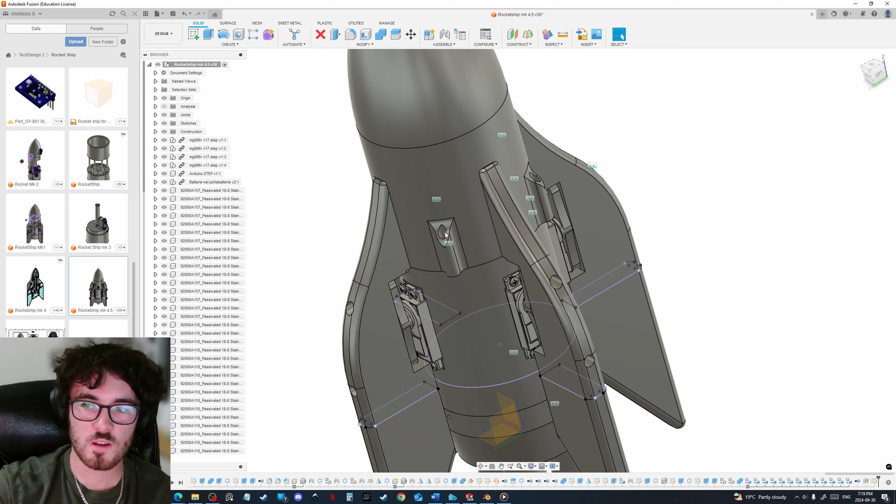So you can see that it was made through 3D printing, and it has a bunch of restrictions because of all of the electronics. It needed to fit the sizes, and the design part of SolidWorks is all about understanding how to design something based on the restrictions of your manufacturing or based on some kind of constraint and to solve the problem.

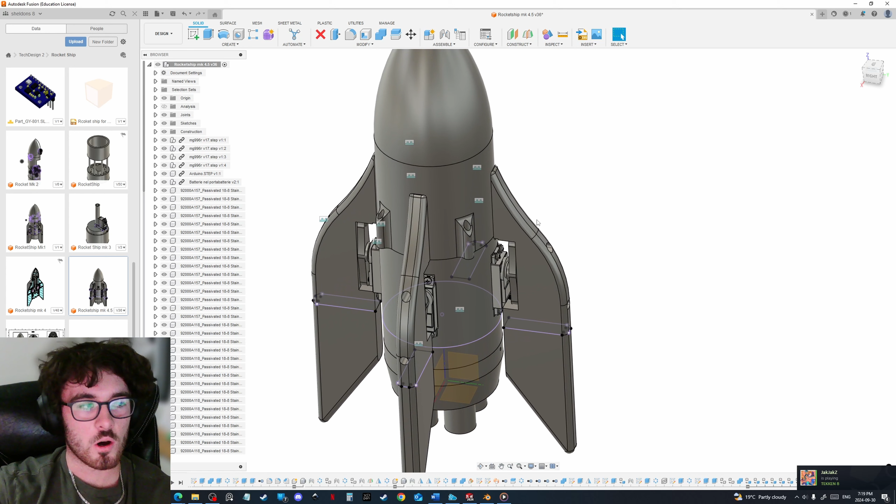But what we're concerned with right now is actually just trying to figure out how to model the parts, and then once you are fluent in being able to model something, then you can easily just apply whatever constraints you have to the modeling rather than trying to do it the other way around when you don't have a good basis for modeling in the first place.

So right here I have a part that I've submitted for the Formula SAE team at Queen's. This is just a generic part. I don't really know what it does. And I want to take a sec to just talk about what SolidWorks is.

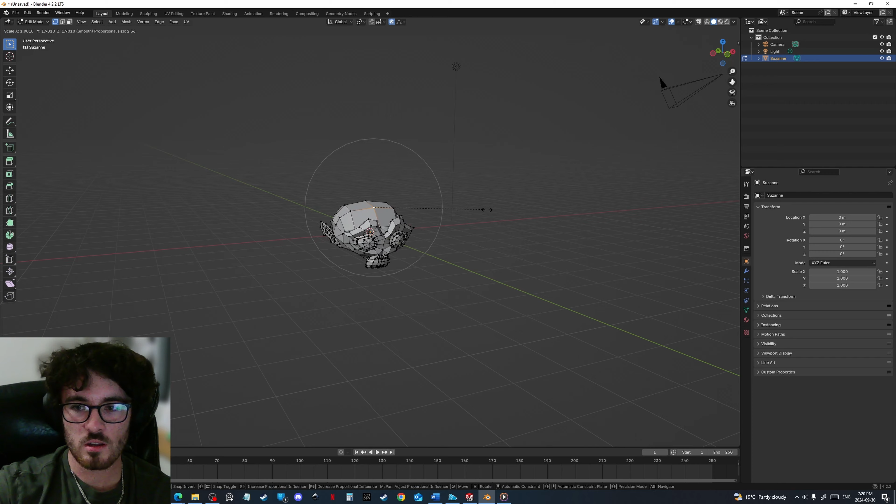So compared to something like Blender, Blender is really free. It's really relaxed with how you can do things. You can move things around. You can kind of do whatever you want. SolidWorks is almost the complete opposite. Everything is math equations, everything is based relative to this origin, everything is defined, it's all measured, it's all calculated, and these are really useful traits for your models to have when you want to design something to be accurate.

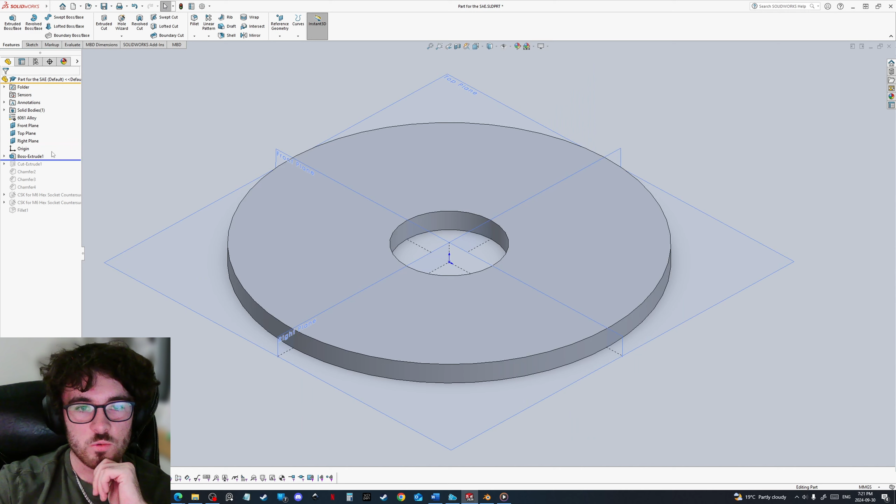So I'm also going to take a second to just break down what we're looking at here. On the left hand here, this is something called a parametric tree. It is actually a timeline which you can scroll through. So this is really useful because if you ever got a part and you didn't know how it was built and it's a parametric CAD part, you can scroll back in the tree, and then you can understand how it was actually built by viewing the changes made to the features, which are derived from sketches in the viewport.

We also have materials. You can find those here. You can edit them, you can make your own, you can import them, and they all have physical properties that are used in simulation. And then you also have your measurement systems on the bottom right.

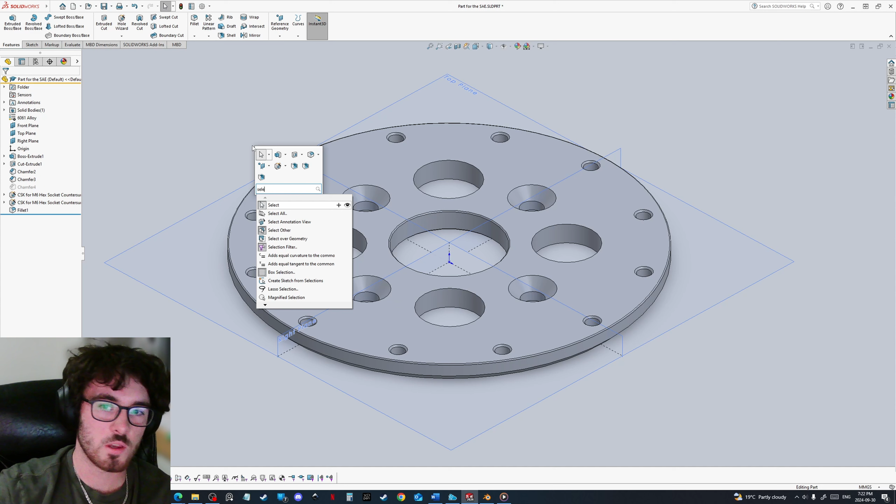One thing I want to talk about quickly is selection filters. This kind of trips some people up. A good rule of thumb is when you hit S, this little menu pops up and you can look at almost any tool that you could have. And if you click this little I here, then it'll take you right to the tool. So selection filters are just used to select different things specifically. If I wanted to just select faces, then I wouldn't be able to select anything other than faces.

I also want to briefly talk about part inspection. So if you go to evaluate, you have a measuring tape and you can measure anything you want. You can measure areas, you can measure diameters, you can measure distances between circles, etc.

And this is really important to have because if you're at the end of your model and you don't want to go and check all the sketches, you can just check some key measurements and make sure that everything is aligned with your drawings. Also, you can click on mass properties and you can see the center of mass, the volume, the mass.

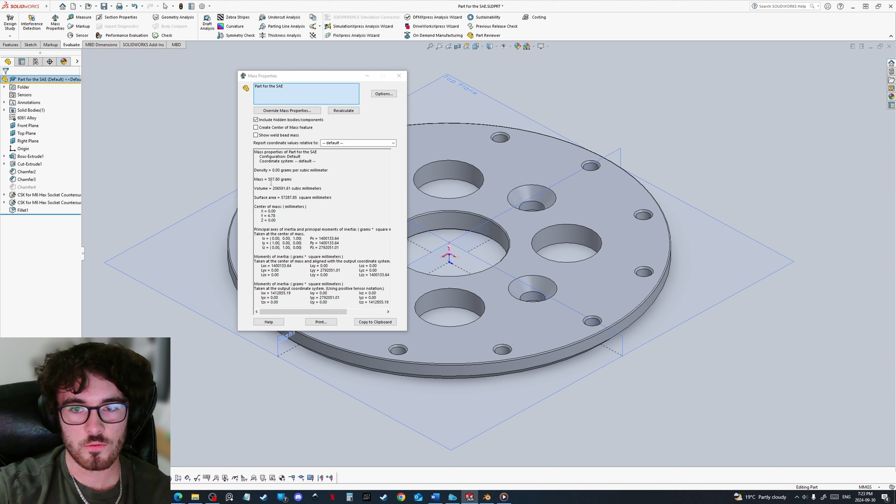Keep in mind that for the majority of parts, if you're doing exams online or whatnot, they use mass and your material to determine if your part was modeled correctly. This is because they don't have time to check the file itself, so they just check the mass to make sure all of your features were imported or created properly. If they are, your mass should be the exact same, because everything is math and it should all work out.

Another key UI element is this eye up here. You can use it to toggle different things to view in your scene. Some really important ones are origins, your primary planes, other planes, axes, and temporary axes, which are all of the invisible axes for any circular sketch objects or features that you might have in your scene.

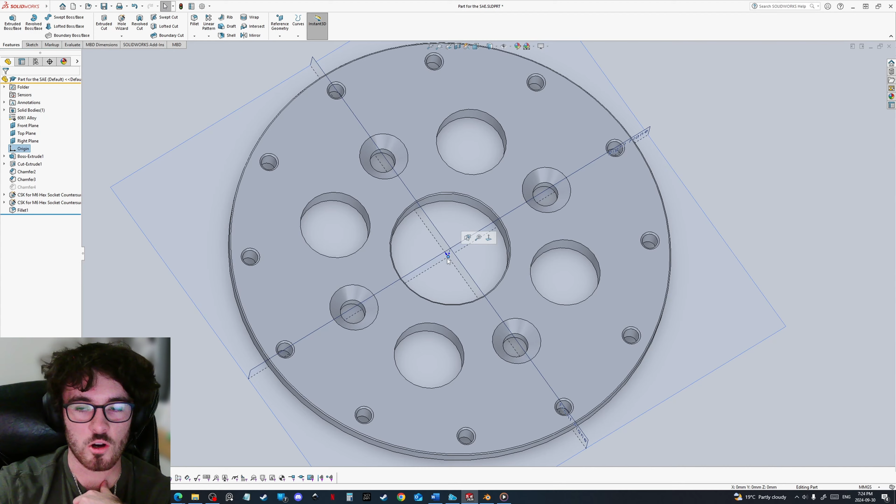I'd just take like 5-10 minutes to get familiar with this so you can have really tight control over your part and look at things really easily. Because if you're fighting what you're looking at, you're just not going to have a good time with anything else. So make sure that you can intuit everything pretty easily.

One more thing I wanted to touch on: what is a modeler versus a designer? Modelers are people who are really good at modeling things in the software, but designers are able to apply all of the modeling techniques with the restrictions of manufacturing that I talked about earlier. As engineers, we want to be designers, because we are trying to make things that adapt to physical conditions, different manufacturing constraints, different clearances, what kind of tools we have available, the prices we're trying to meet, and all of that comes from designing.

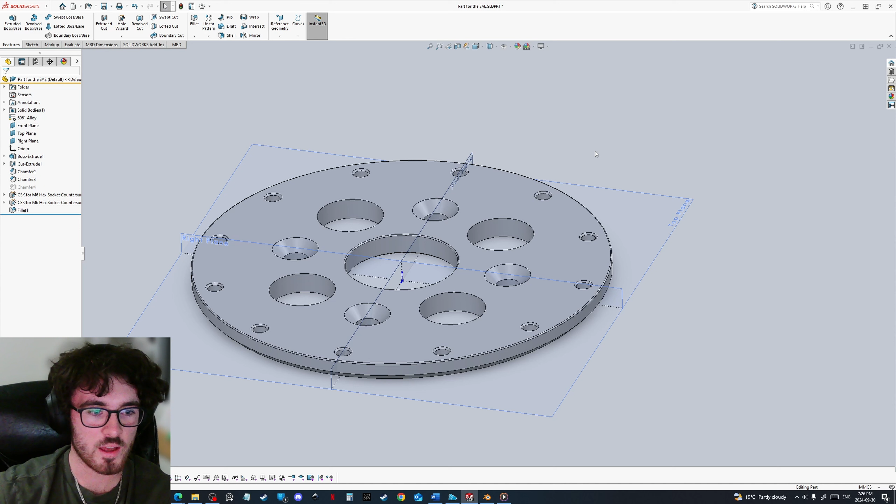It's kind of the blending of modeling and engineering, which is what we want to get to. But before we get to that, we've got to learn how to model, and then we can start doing simulation and other complex processes to actually understand the geometry we're creating a little bit better.

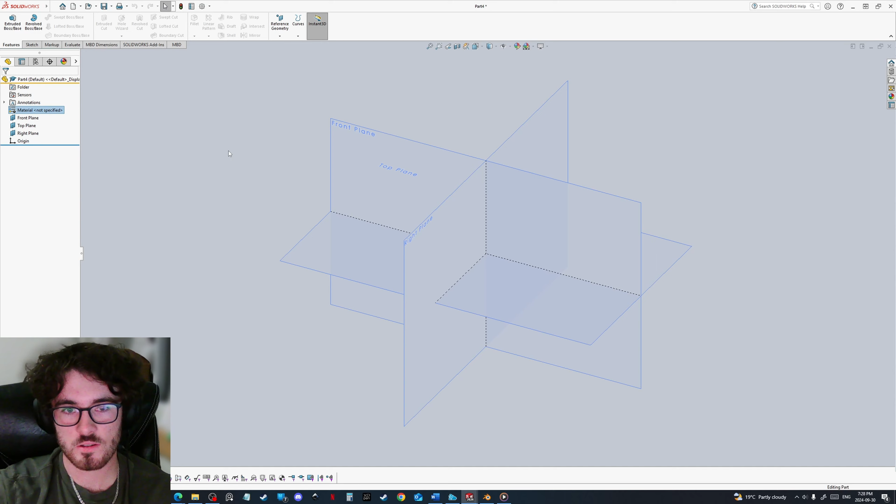Okay, let's start modeling a part. We're going to unhide our planes. That's usually a pretty good place to start. We're going to check that we're in millimeters. We're going to define our material, just something generic, 1060 alloy. Then we're going to select this top plane. Let's understand first what something being defined means. What does it mean to have measurements?

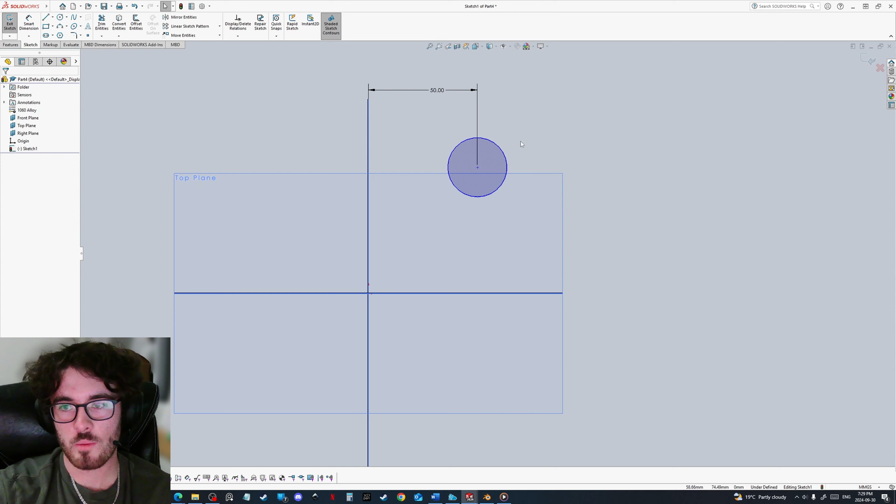If you select this circle, you'd think you'd be able to come over here and punch in your measurements, but that doesn't work. Even though you define it here, that's not how you properly define something. You're going to want the Smart Dimension tool, which actually creates measurements in the software. If we make the center point on the x-axis 50 from the origin, it is always going to be 50. No matter what else happens to this circle, we can drag it, we can scale the radius, it is always going to be 50 from the origin.

The goal is to lock out all of these dimensions. We want to make sure there's no uncertainty with where this circle is or how big it is. Now it turned black, and we can't really do anything. We can't drag it. It's defined in space. It has a defined radius. We know for certain that this circle is following these measurements.

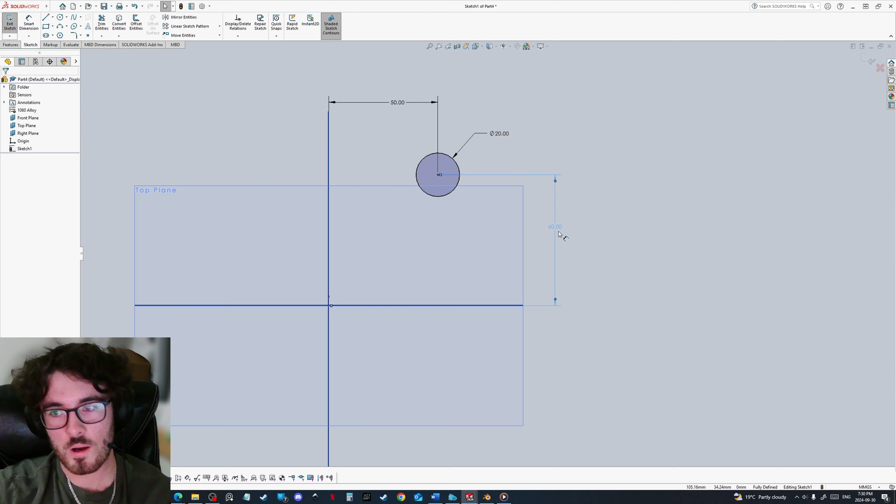Dimensions are really good, but when possible, always try to use geometric constraints. When you create more complex parts, geometry is eventually going to have to reference itself. The best way to make sure your model will update properly is to add these relations. If we wanted to make this centered, sure, we can define both with dimensions, but you can also shift click the midpoint, shift click your origin, and make it vertical. Now, no matter what happens to this, it's always going to stay centered.

So now if we can define it once, and we'll say it is 100. But that's kind of weird. Why did these ones get defined and this one doesn't? When I was first learning it, I didn't really understand it. It's because this one can still move up and down. So when you're looking at it, you should really be looking at these points. Those points are still free to move up and down, even though they are constrained to 100 millimeters in width.

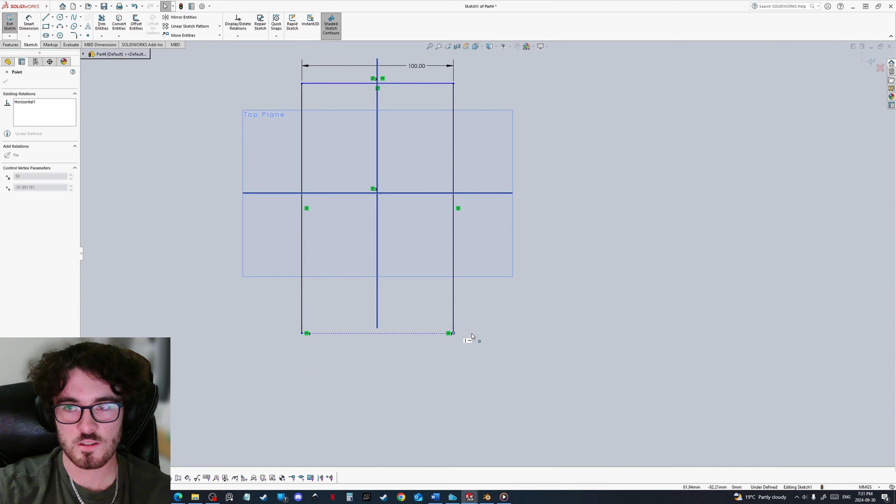We can pull these down a little bit. Another good rule of thumb is to just click and drag any points you want, and then that'll tell you how it's underdefined. We'll make our arc on this side, actually. We'll make this too. And notice how everything went underdefined because I deleted that line, and now I also deleted some of the geometric constraints.

We're actually going to make this coincident, and now we're going to try and define stuff relative to that. So the other geometric constraint making these horizontal also disappeared, so we're going to correct that. We're going to make this arc tangent, and we're also going to define this relative to the origin as well. And let's make it 145.

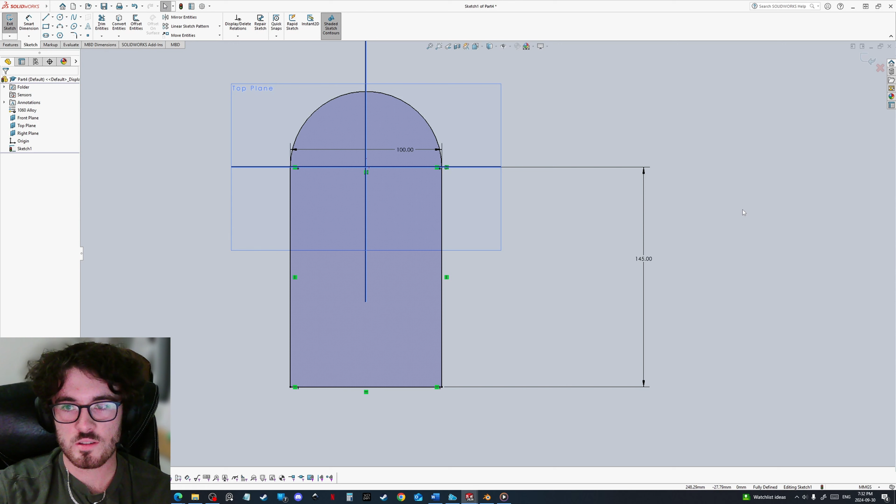So now we have some kind of geometry. It's pretty generic, but it can be updated pretty well because it's really defined by only two things. If this wasn't tangent, we could have defined the radius separately, and we could have defined a bunch of things separately, but now the model will update pretty well.

But let's get into some extruding. We're going to extrude this out, and we're going to make another sketch. We're going to do it on this side, and I'm going to try and go kind of quick here, just because I'm trying to get to something else. Notice how we're only 2 features in, and I'm already referencing stuff from other geometry.

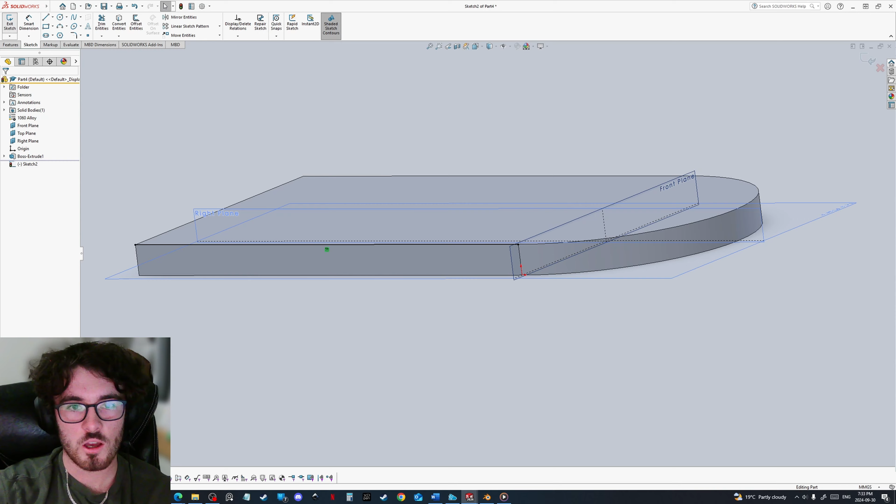So another really useful tool is this convert button. You hit it, and you have the edge from the 3D geometry projected into your sketch. So this is actual sketch geometry now, but it comes from this edge. And what that means is that if I was to take this sketch and change it, 150, that means that this sketch updates as well. That geometry stays the same in this sketch because it's referenced to that edge.

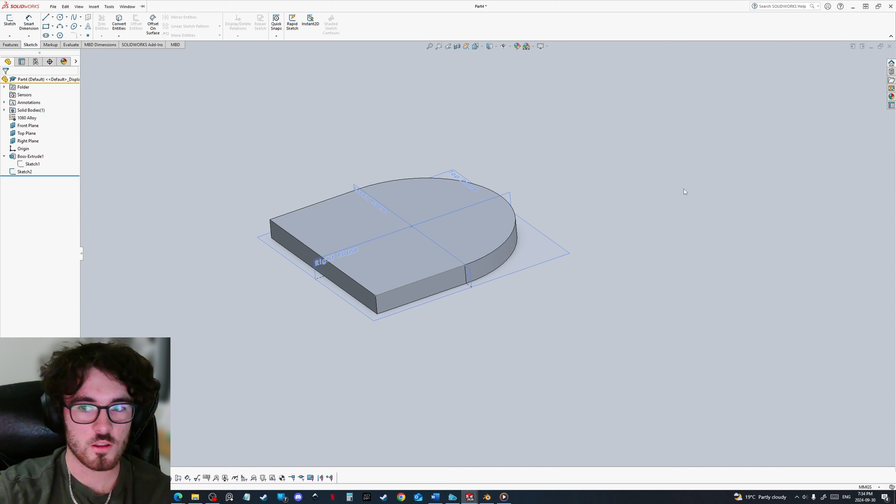And that's a really important thing to know, because if all of the geometry was underdefined previously, then that wouldn't be defined either, and then the model might not update properly. And that's really the power of SolidWorks, because now we can actually reference other geometry and the model will update according to the dimensions that we put in.

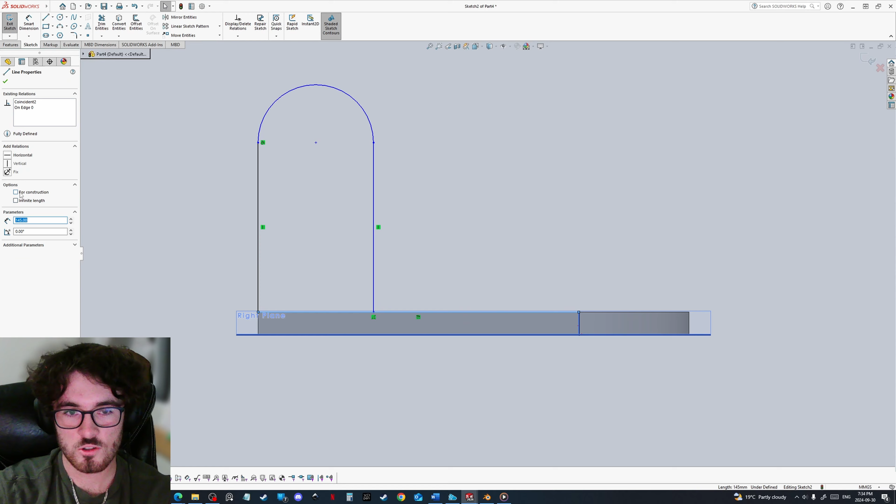So let's go back into our other sketch, and we're gonna make basically the same part. And we'll just kind of sketch this out pretty quickly. We're going to make this construction geometry, meaning that it's not going to influence our features because we're just going to redraw this line. But what's interesting is that that line is coincident with that line, so it shares its definition. We're going to make sure these are tangent. And we're going to make sure this is horizontal.

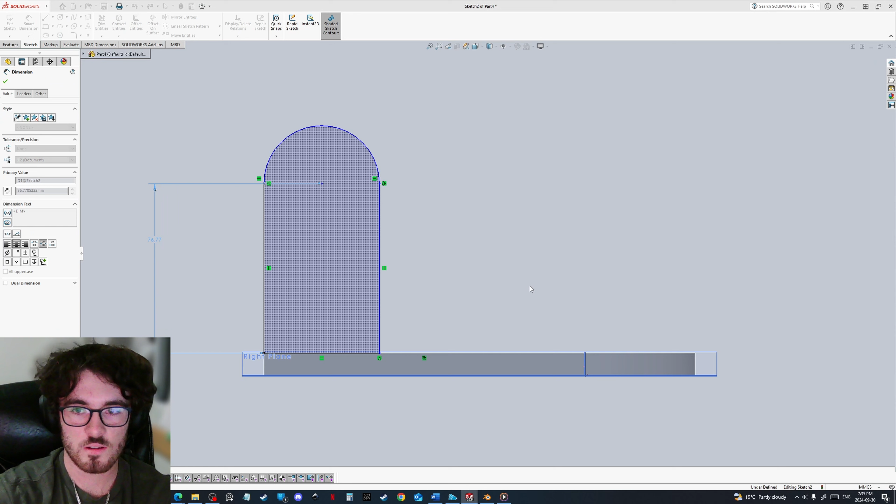And this time we're going to define based on the midpoint, or the middle point of that circle, and it's going to be maybe a little shorter, 50. And now we can define that. And, I don't know, you probably wouldn't do this, but we'll define it based on the midpoint, just so we only have one dimension. And now that dimension is controlled based on how long this is.

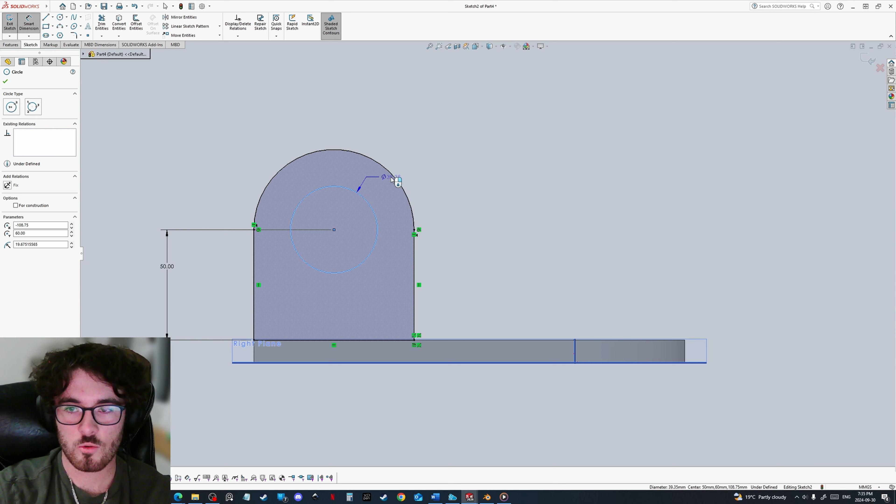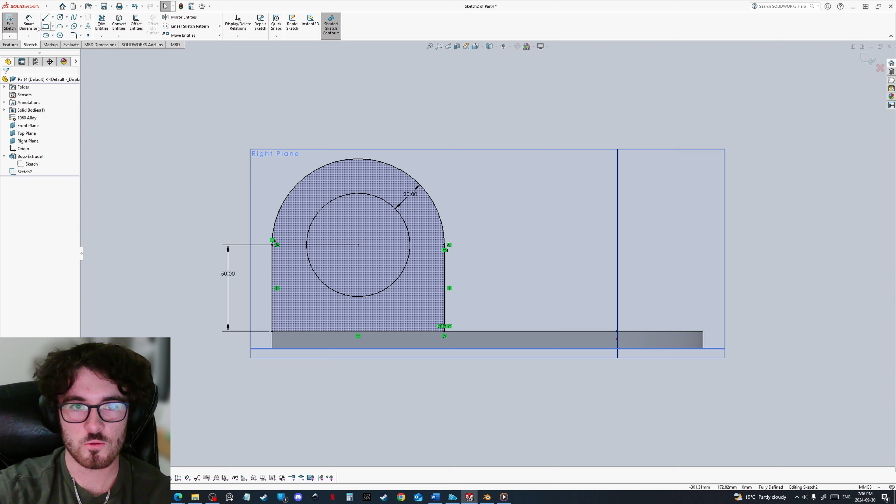We're also going to make another circle in here, which is going to be concentric. Since they are concentric, we can just define that width pretty easily, and it's always going to be maybe a little smaller, 20. Or maybe we shouldn't do that, because now that's relative to that, and if this were to change to like 200, our hole would also get bigger, and we might not want that. So instead, we want this hole to be a constant size, so that's why we're going to give it a dimension of 35 millimeters, and then we're going to just extrude this.

And quick primer on end conditions. So there's multiple different kinds of end conditions. This one's a blind, which means it's just extruding a generic length. Then you've also got through all, which means it's going through the entire model.

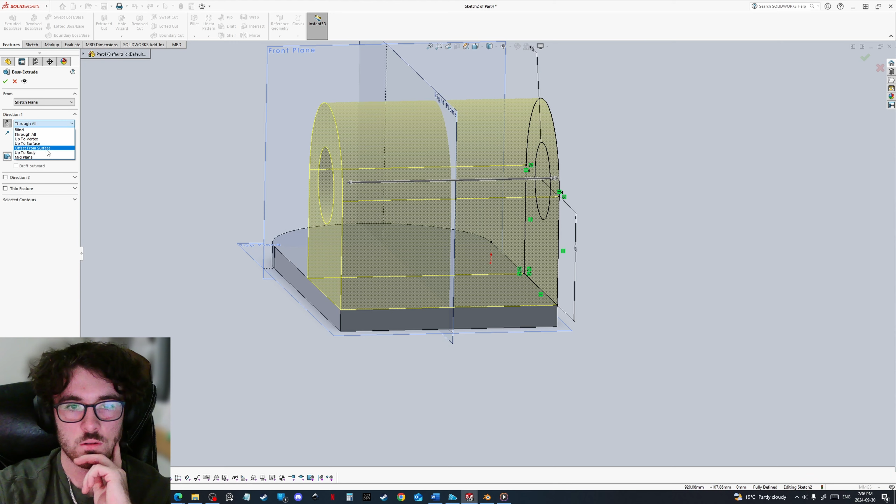And this one's the one we're interested in though. It's up to surface, so we can select any surface and it'll extrude up until that point. We're going to make another sketch and we're just going to make a generic cutout. If we hit space and we go on to there, shift select the top of this edge, convert that over, make it construction geometry, make this collinear with that edge.

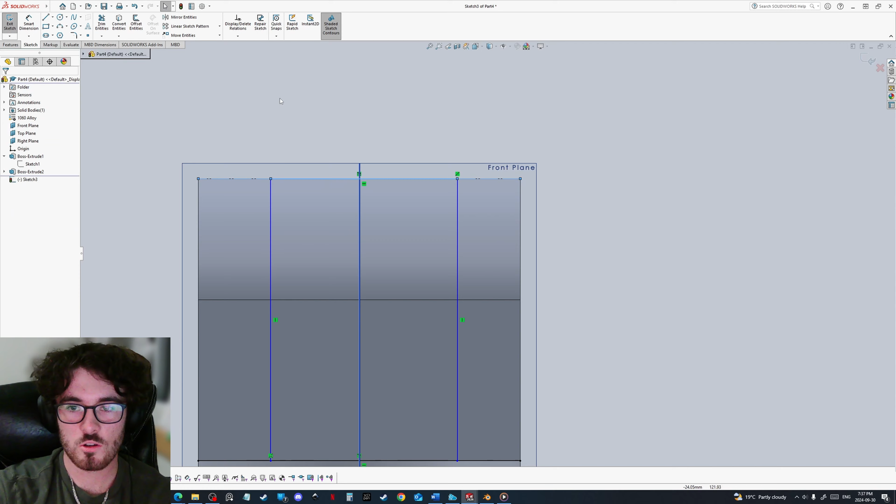Let's go 10. And let's also add another line. This is going to be another construction line because it's going to be our line of symmetry. 1, 2, 3. Symmetrical constraint. And now that's all defined, through all. There we go. So now we have a pretty generic part.

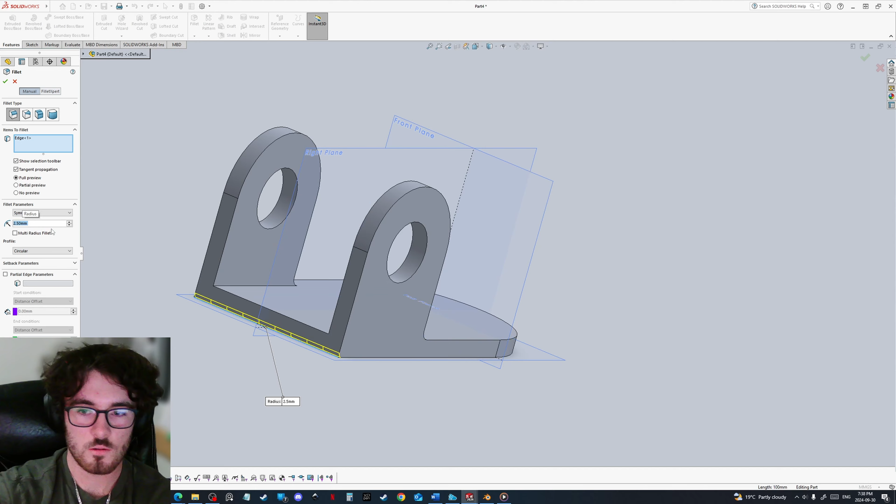Best practice is to usually save all of your filleting to the end. Maybe we want to make a couple fillets. And another good idea is to do fillets in multiple steps sometimes. So maybe we'll have these ones as being 2.5, and we'll make some of our larger fillets 5. Okay, so not a bad part, but we're going to make another part because we're going to make an assembly.

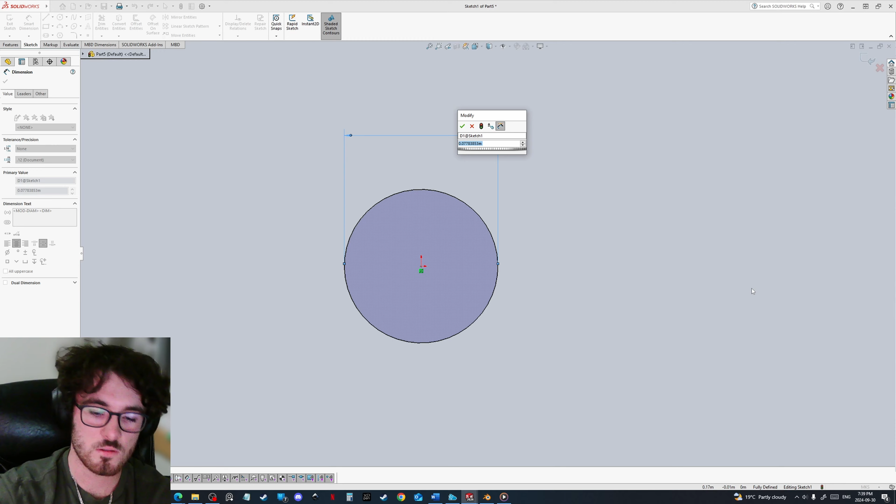We know this diameter is 35, and we're going to try and 3D print this assembly, just so we know how. So that diameter is 35. A good rule of thumb might be to make it a millimeter smaller, depending on the fit. This can be really finicky, so you might have to figure this out for yourself through multiple prints or other guides. On another note, you can add equations into the box right here. So we'll do 35 subtract 1, and then we're going to extrude.

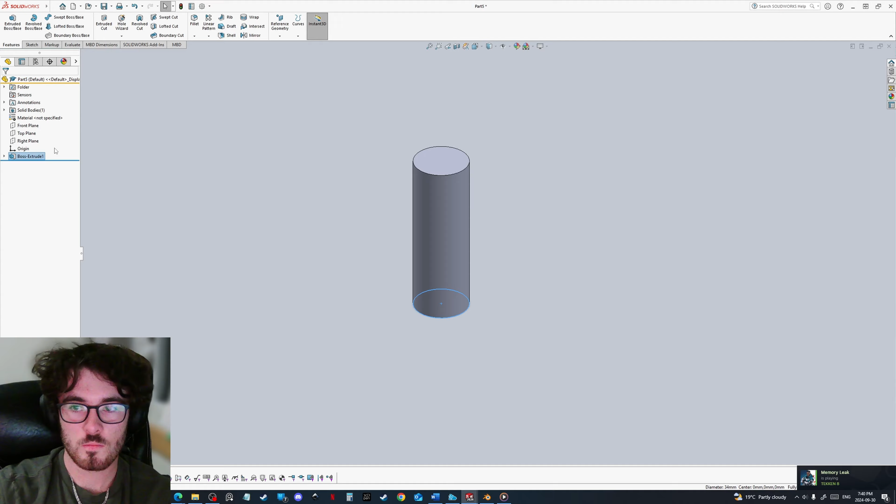We can tab back over to our other part. So that's around 100 millimeters. We could have probably told from the sketch, but I don't want to go searching for it. Nothing's on the other side obstructing it, so we'll just extrude it 100 millimeters blind. And for fun, let's give this thing some funky features so we can see how lofts work. So I'm going to suppress our fillets, which essentially hides them, getting rid of the feature for now.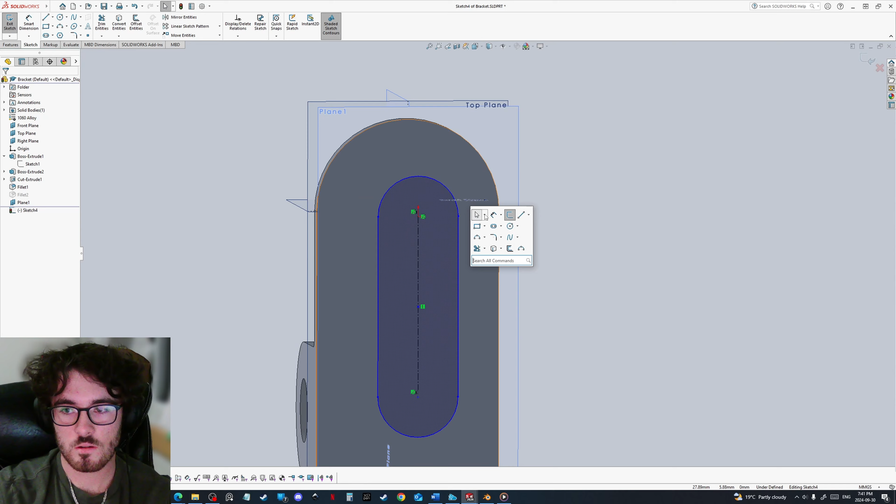We're going to create another plane. And sure, 50 is good enough. We're going to make another sketch. Lofts are pretty advanced, but we're just messing around, so we'll see how they go. We're going to make a slot, define the slot, 20, define its length. We'll make it relative to the back instead of a fixed length, so it'll update with our model a little better. The center of that circle should always be 50 millimeters from that back wall.

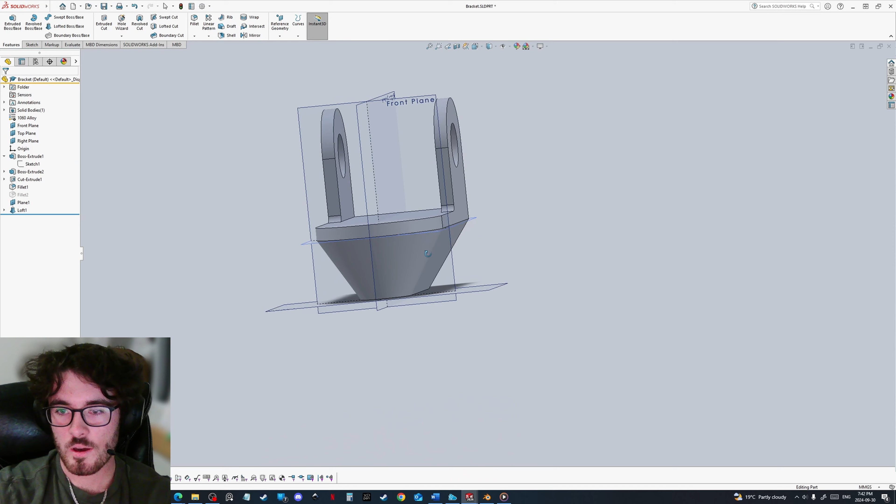And you can start to understand why this might be a problem, because if we ever changed our width to where this measurement isn't possible... actually, let's do that really quickly. I'm going to make this loft, and then we'll try that out. So loft, and it creates really smooth geometry. You notice the interpolation is very linear. You can always add guide curves along the sides to change that interpolation, but that's out of the scope of what I'm trying to show here, so you can look into it if you want.

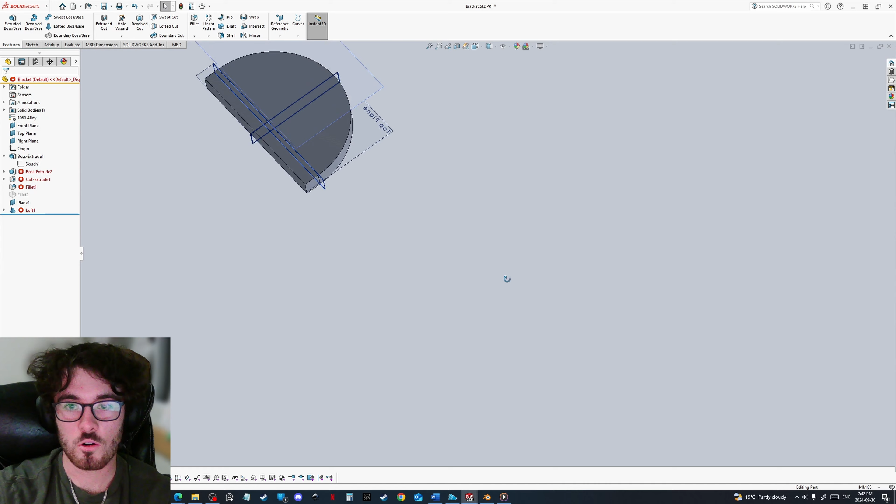What would happen if we made our sketch a little shorter, where that measurement just wasn't possible, like 10? Our entire model is going to blow up. See, all of our features are no longer possible, because this sketch is now looking like this. Maybe I should be a little nicer to this part, and we'll say it's 75, so some of the features can get made.

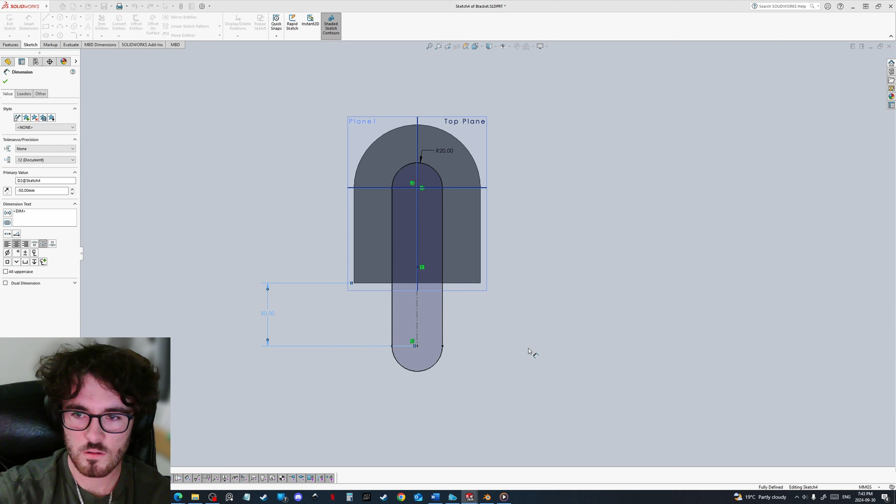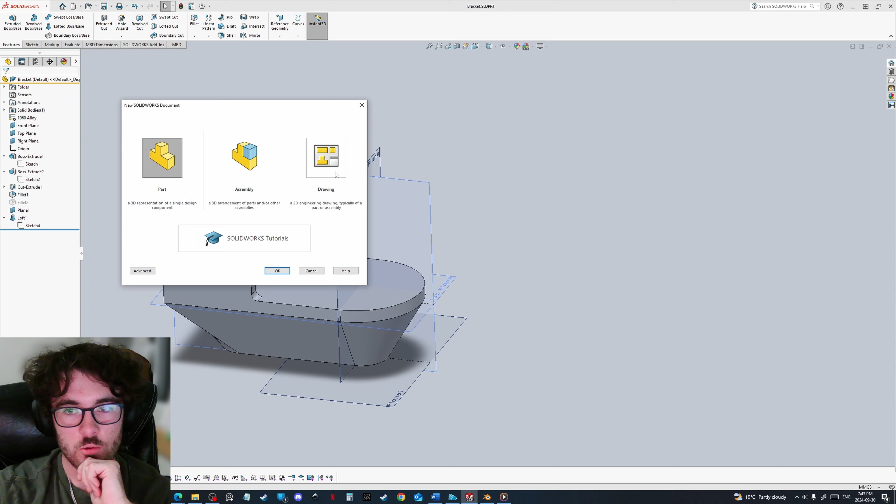Okay. So you could see when we updated our part, the diameter of these circles stayed the same, this got shorter, and this got pushed even further in. So you can start to understand how changing your part in different ways will alter the actual model, and your relations matter quite a bit. Now we're going to make an assembly out of these two parts. We're going to put our bracket down, and notably, we're going to treat this bracket like our origin.

That's why it has that F. It's fixed. We can also float it if we don't want to, and we can drag it around, I guess. But we know this one needs to be static, so we're going to fix it, and we're going to insert another component. That's going to be our bracket. No, it's not. It's going to be our dowel.

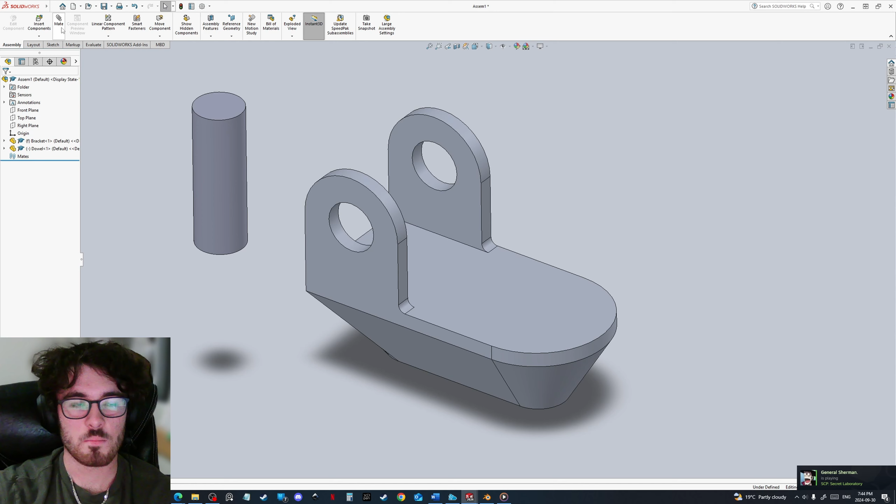And now we can start getting into mates. Mates are a really cool feature in SolidWorks because it's essentially just like defining a sketch, but you're figuring out how different parts slot together. If we select this circle and mate them, that creates a concentric mate. So now we know that these circles are going to be concentric no matter what, but it's still underdefined because it can move back that way. We don't really want that. We want it to just be able to go in circles.

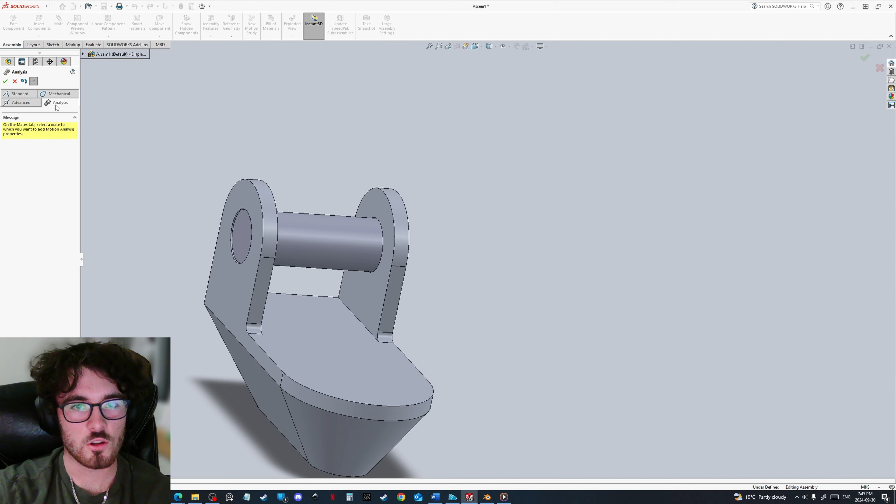So another really good mate to know is the width mate. You essentially select both of your widths, and it'll perfectly center the part every time. So if this part ever updated to where it was wider, that ensures that that part is going to stay centered in the width. So you can see how it's still able to spin, and that's exactly what we want.

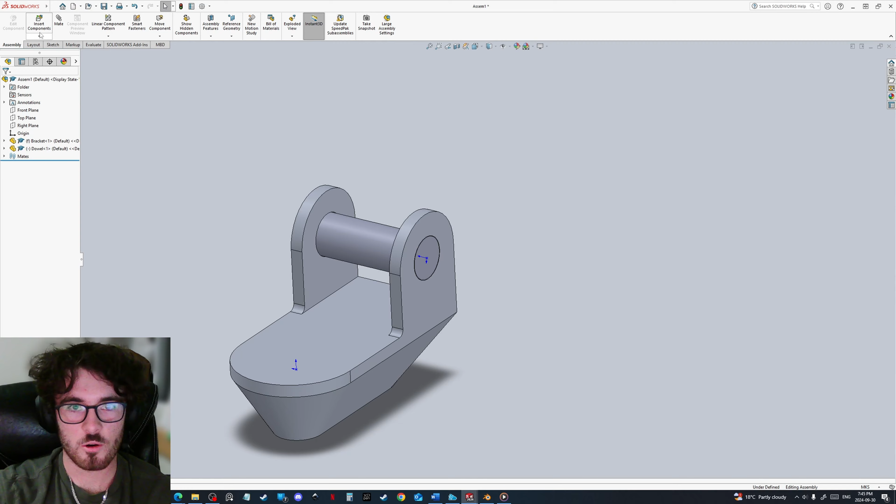So let's create just another generic part that'll lock onto that, and we're going to go as fast as we can. So we're going to obtain the measurement between here. It's 80. We're going to make it like 79 because we don't want it to be brushing up. Okay, so now we're going to make another part really quickly. I don't know what's happening with my views.

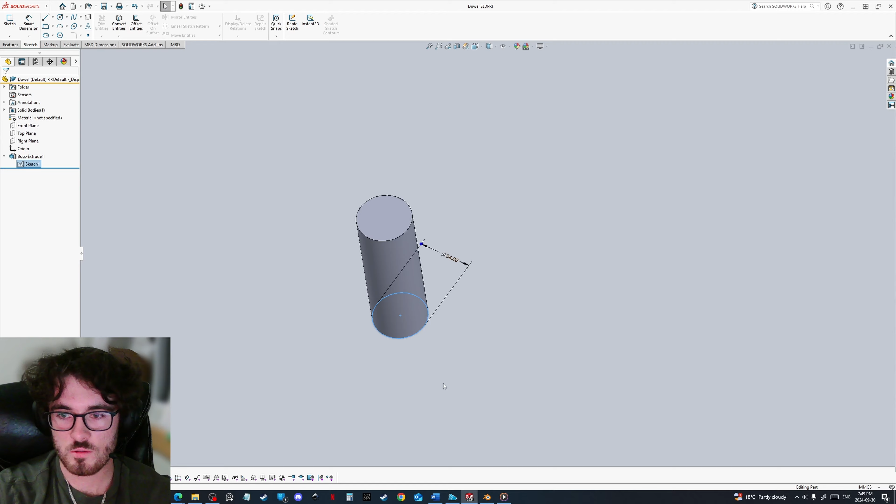So we're going to take a measurement of our dowel, which we know to be 34, and then we're going to go back over here, make this the radius, 34 divided by 2. We'll make this a little thinner too. It would be kind of cool if it lofted out. I'll explain what that means in a sec. And this, make it like that. So 17, we make that coincident. And this represents the dowel.

And then we can offset this with this tool, offset. Because we're going to be 3D printing it, we're going to want it kind of bulky. If our print head is only 0.4, then that means it can only extrude like 0.4 in like a sphere, I guess you could think about it. I'm not really too sure how to explain it, to be honest.

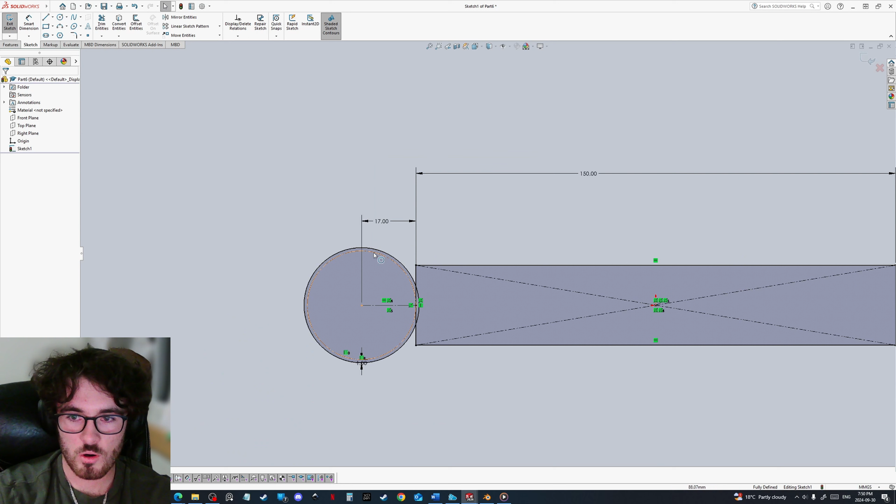So first we're going to make our offset. It's going to be 1 millimeter, so that's the amount of clearance we're going to have between the dowel and the part, and then we're going to make the actual thickness of the part, and we're going to say that's just going to be around a centimeter for fun. And oh, I can't really get rid of that now. That's another weird way of defining things. I really shouldn't have made this rectangle to start, so this is a pretty bad sketch, but we'll just go with it, and we're going to make some cool features with curves, because curves always look nice.

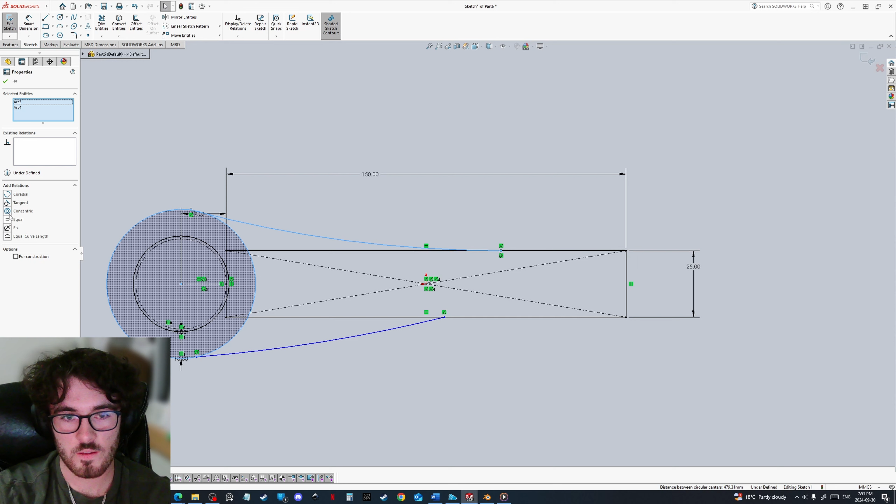We're going to make this one tangent, and we're going to also make it tangent to this one, and then that should almost fully define it. We're also going to make the symmetry line so we don't have to do things multiple times. Make it symmetric. It didn't like that. I think it's because the radius needs to be curved inwards first. So, symmetric. We'll try that again. There we go.

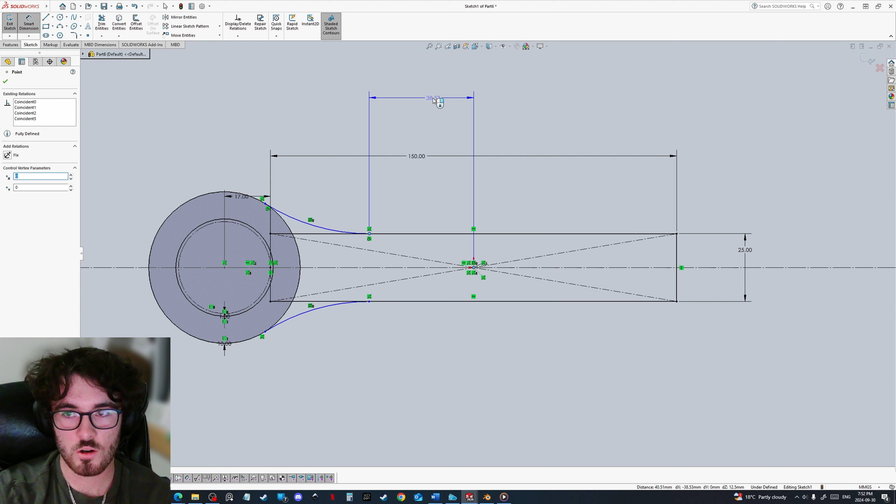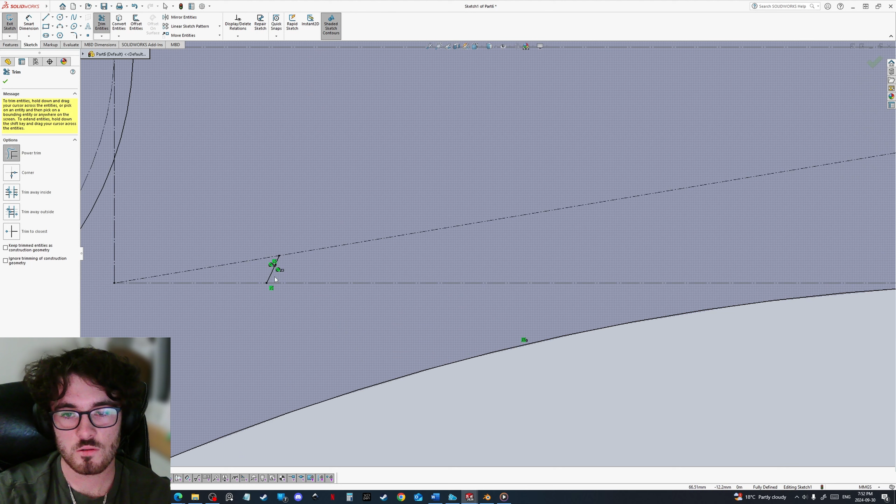And we still have control of how much curvature we want and how far we want it down the part. So we're going to define this relative to the end, and we're going to say it's maybe 100, and then we get some decent curvature still on the part. Make these construction as well, and we'll just redraw it. Very messy sketch. Definitely wouldn't have started with this rectangle in the future. If you really want, you can use trim and trim away some of the circle so it's cleaner. You don't have to. That's really a preference thing.

I like keeping all of my sketch geometry messy just because it shows me all this stuff, but I don't know, whatever. So then we select this, and then we're gonna make it the width. So that's a distance of, I don't know why that's in meters. What the fuck? Okay, so if we remember this length, it's 80 millimeters, so we're probably just gonna make it like a millimeter less, maybe, or a millimeter or two, doesn't really matter. We'll be able to see how it fits together once we get it into the assembly. We'll just try like 78 millimeters.

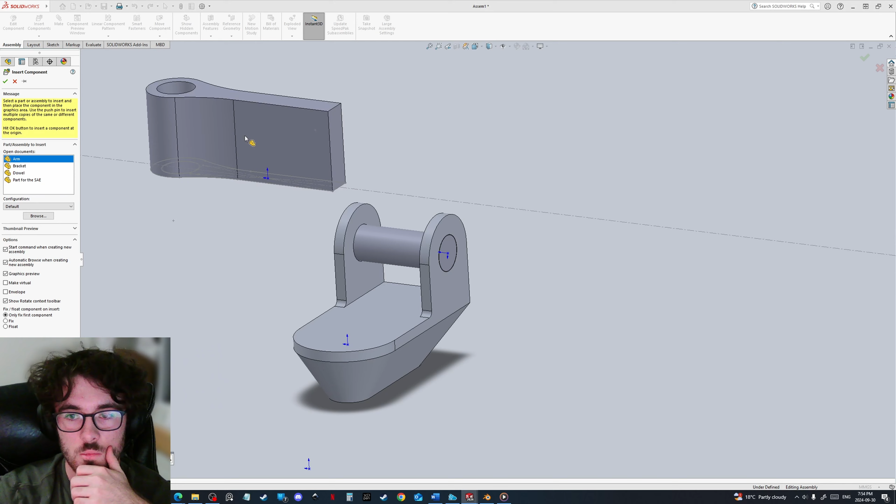Yeah, it does have a closed contour. Select our contour. There we go. Insert components. Insert from the other document, not the dowel, the arm. And those sketches are kind of annoying, so we're just gonna hide that sketch and we'll mate it. Same as before, concentric mate. And then we're also gonna make another width mate.

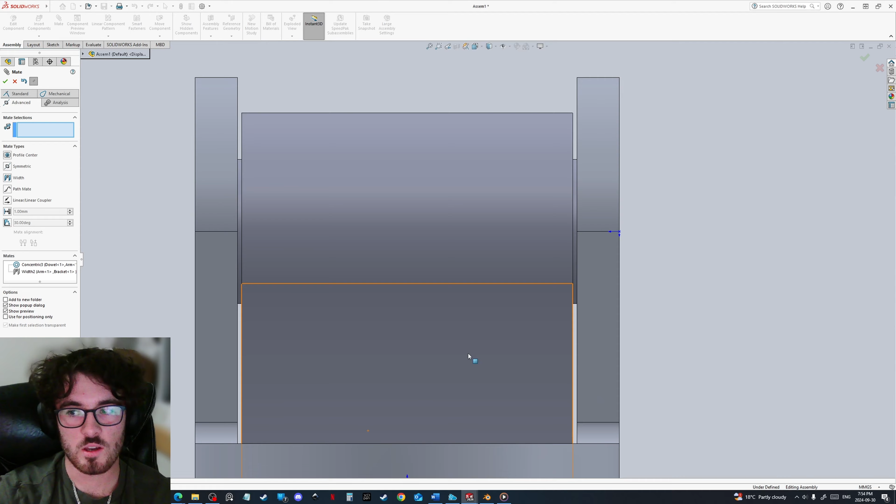And that's another thing. The width mate is independent of your clearances. So if we were to make this a coincident to the face, and then with some kind of offset, we'd have to change that every time because of the clearances. If we ever made it smaller or bigger, then it would be always hugging that wall, but the width makes sure it's centered. So that's good. And this is free to spin around. I don't really know what we've made, but we certainly have.

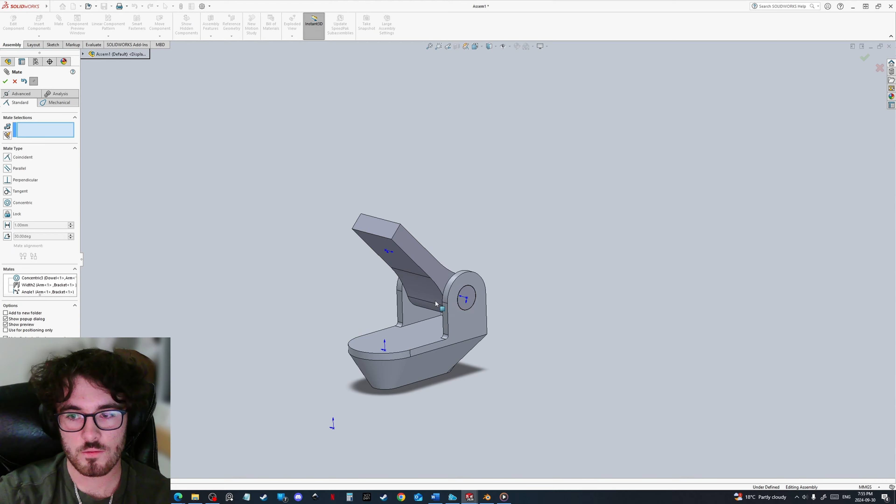So if you really wanted to, you could define some kind of angular mate, so we could say this needs to be 45, and then now this assembly will be fully defined, because there's that angular mate keeping it in place. I'm not really a fan of that, because I want to see how this thing is actually going to move, and you can kind of see how it moves.

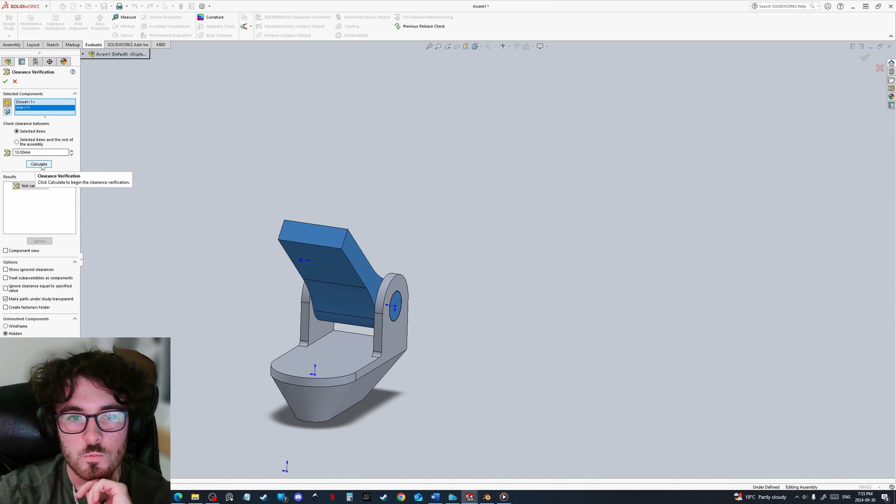You can also run, under Evaluate, clearance verification, so we can make sure that this dowel and this are not touching. And we can see all the clearances. You can see there's 1 millimeter of clearance there, and that's pretty useful to see if any of your parts are touching or if they're clipping into each other or whatever. And there's plenty of other things you can do. Interference, clearance verification, you can do design studies, you can...

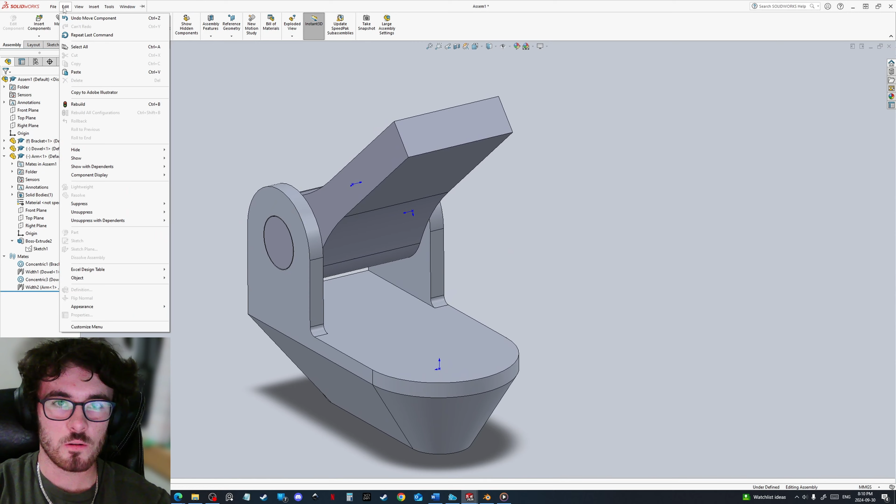Alright, one more thing, we're going to talk about some basic 3D printing. So when you're 3D printing something, you want to usually export it as an STL, because remember that SolidWorks is like pure math right now. It's all calculations. We need some actual real geometry. So we're going to make a mesh file, an STL that's just a bunch of points and a bunch of faces. It's what's in Blender actually. It's basically an STL. This is what a mesh looks like. That's what it's going to make.

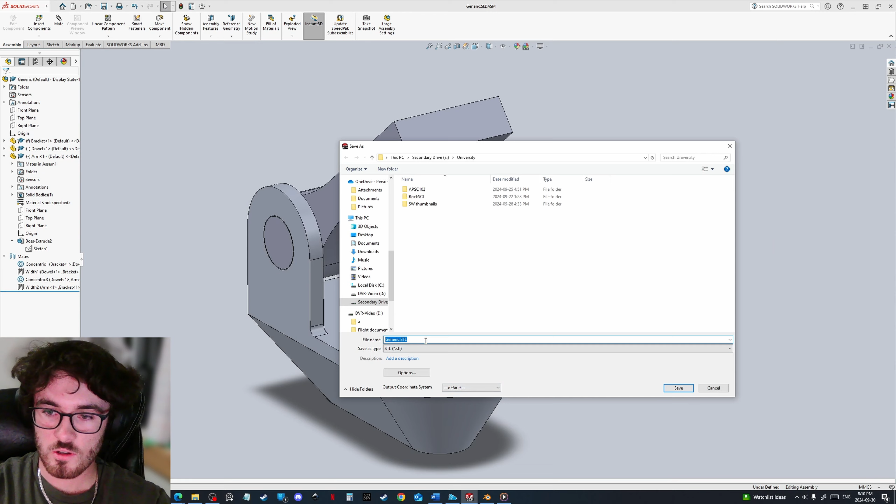So we're just going to call it assembly, I guess. And this is what the mesh looks like. You can see how it's creating all of its triangles. And we'll say yes, create the thing. We're going to pull it into the slicer. I have a Bambu printer, so we're using Bambu stuff. But this is the same fundamentals. It doesn't really matter. I just want to introduce some quirks to 3D printing stuff.

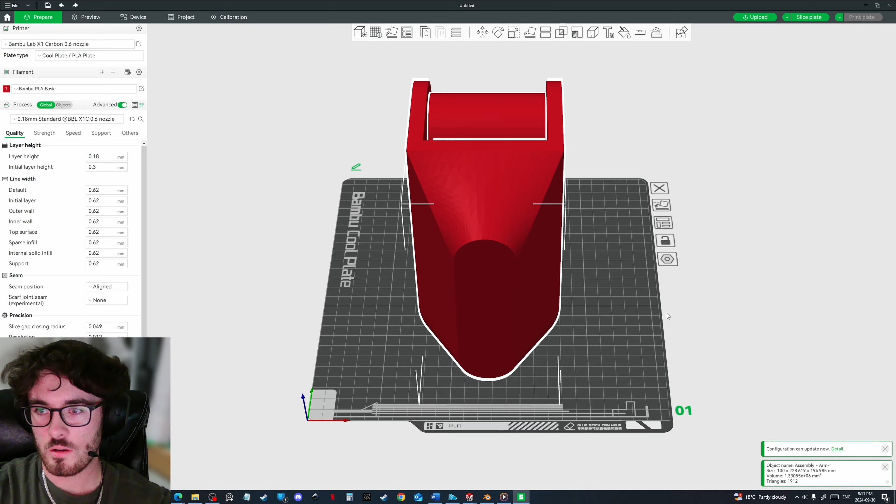Yeah, so here's our assembly. We're just going to click and drag them. And here it is. It's pretty big for the printer, so let's just pretend that I modeled this to scale. And we're just gonna scale it down a little bit. Here it is. Nope.

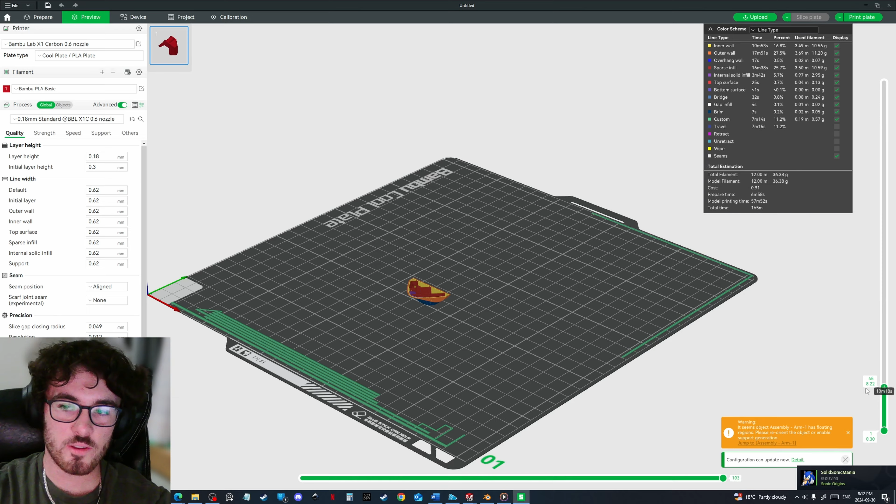Okay, so something to consider with 3D printing is that everything is made in layers. So if I was to slice this right now, which is to turn the model into just a bunch of layers, then this is kind of what it would look like. You can kind of tell that geometry would be pretty impossible to make because of the overhangs. Because if you're printing, and you get to this point here, where you have to make an overhang like this, that's like 90 degrees, then the slicer just can't do it because it prints layer by layer.

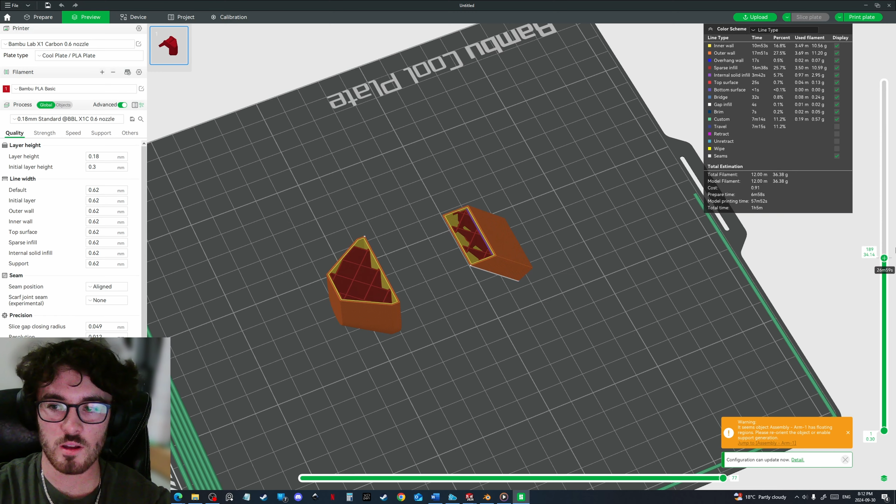So you need to orient your parts and design them such that they can be printed from bottom to top. So that is one of the constraints for 3D printing. You can auto-orient it, but we're going to print it as multiple parts because we designed it to be assembled. Click off it. We're going to take this and we're going to lay it flat on its face.

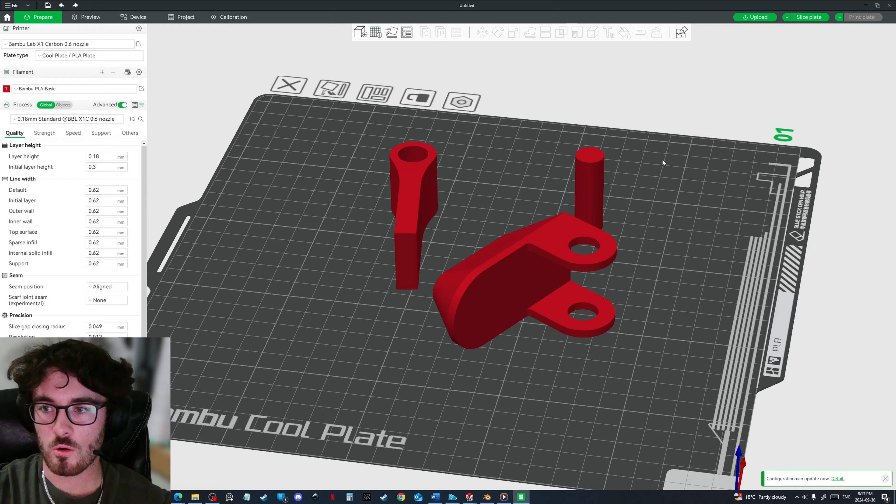Lay on face. We're going to pick that one. Dowel. We're going to pick this and we're going to pick that. We're going to lay it down like this. And oh no, that's worse. You kind of got to figure it out. Bambu thinks we should orient it, yeah, like that.

And then we're going to have to generate some support in, although it might not be necessary because the overhang is at an angle. So when it's progressive, there's a chance that it could, but just to be safe, we'll put support on it, which is like, you can think of it like scaffolding for your 3D prints.

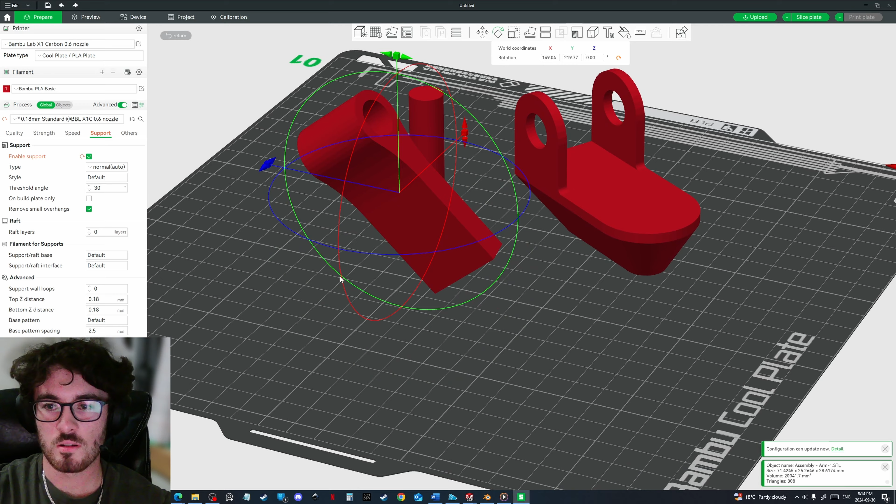So if I had something like this and then we rotated it like that, and we sliced it. So it's creating the scaffolding because you need support there to help the 3D print so it has something to print on for that overhang, and the same thing is happening right over here. And here are some important elements.

Your material, I believe we're printing in PLA, which is just some generic plastic. Other materials that you might see are carbon fiber. This is very, very strong tensile material. I think it's like 5 times stronger than steel. Very strong material, very common to work with, UV resistant, and has some other cool properties.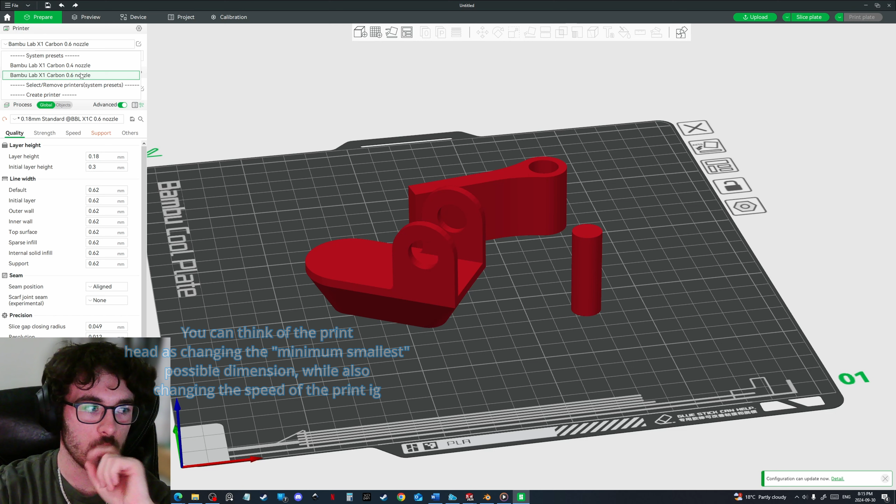Your nozzle also is very important because this is how much material you're actually extruding. So if we were printing this with a 0.6, then our slicer also gives us plenty of information about how long it's going to take, how much material it's using, and you can see all the different steps to creating this, and you can start to understand where your time is coming from, spending on infill, how much is spending on travel.

So you can get really into optimizing these models based on the strengths and the surface patterns and how much infill they have, which is just like the scaffolding inside the part, how dense it is with plastic, because printing it solid plastic wouldn't really be smart because you basically get the same level of strength from just the scaffolding. You use less material, prints faster, etc.

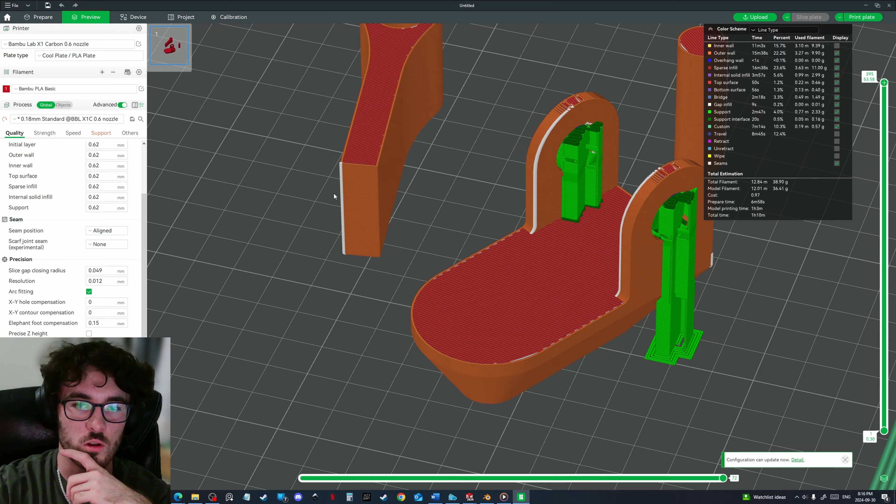You can dial in all the speeds, you can change all the supports, different kinds of supports, and you can change the different qualities, the layer heights, the seam positions, because this is where all of the layers end. So as soon as it goes around all of these different points, it has to end there, and that can influence the quality of the print in some ways. Different positions. I don't really mess around too much with these options.

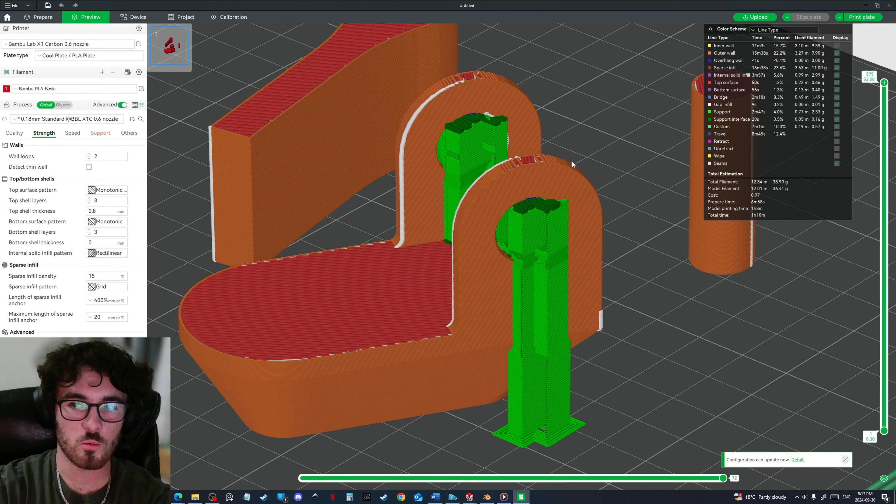You can also change the layer heights themselves, and that's not really important for prismatic stuff like this, but it's important for stuff like this where there's curvature. You can also make adaptive layer heights, so it'll change the layer height once there's curvature, or you just have it all the way through, but that's kind of out of the scope.

There's plenty of stuff you can research for this, and it's really good to understand what's actually happening when you're printing the part and how you can print them faster, how you can save material. Also, a quick introduction to drawing. You can select your assembly view and you can make it shaded and colored. You can change the scales down here, and then when you actually want to make a model view of the assembly,

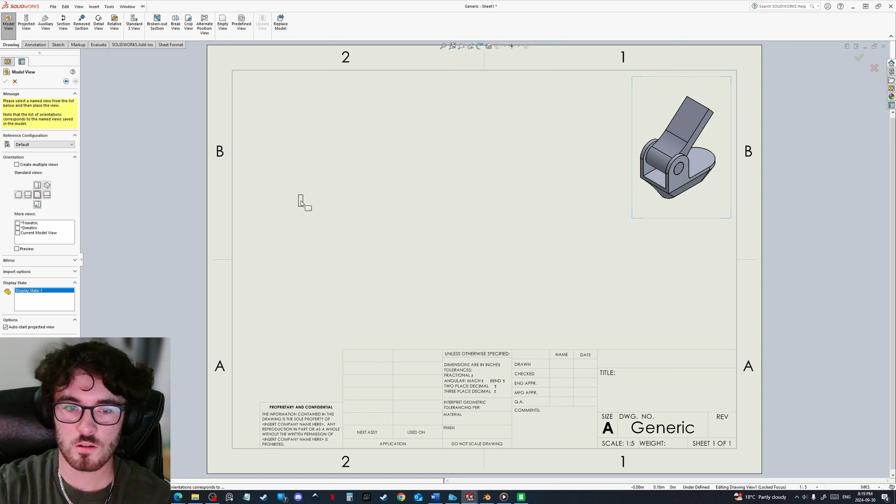double click that, and then you can drag it in here. We're going to change it to use a custom scale. It's going to be 1 to 5 like the other one. And we're going to make this one 1 to 5 as well. And something important to remember is that this follows all of the same rules. So now we're going to also make some drawings.

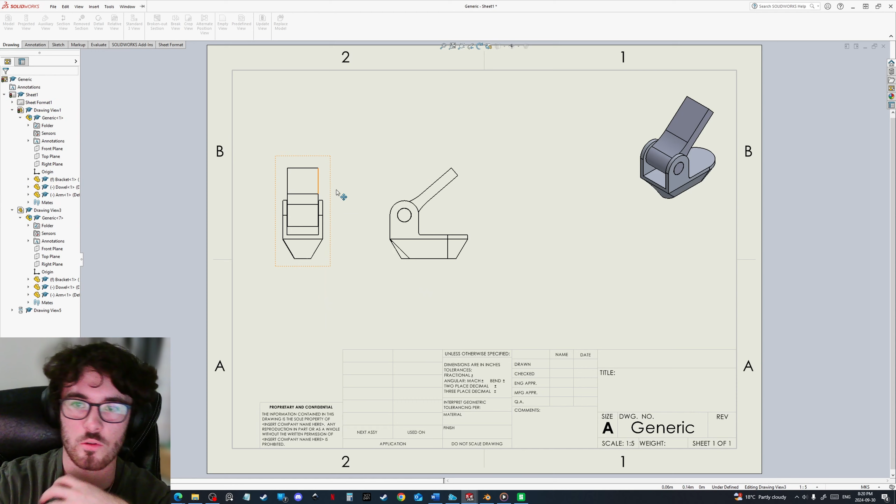So after we have our main views imported, we can click the views to make more. And it follows all of the orthographic rules from our drawing. So you can also double click them and you can change the scale. You can make them shaded, no lines. You can see the hidden lines, basic stuff. And then under annotation is where it really gets cool, where you can start adding center lines.

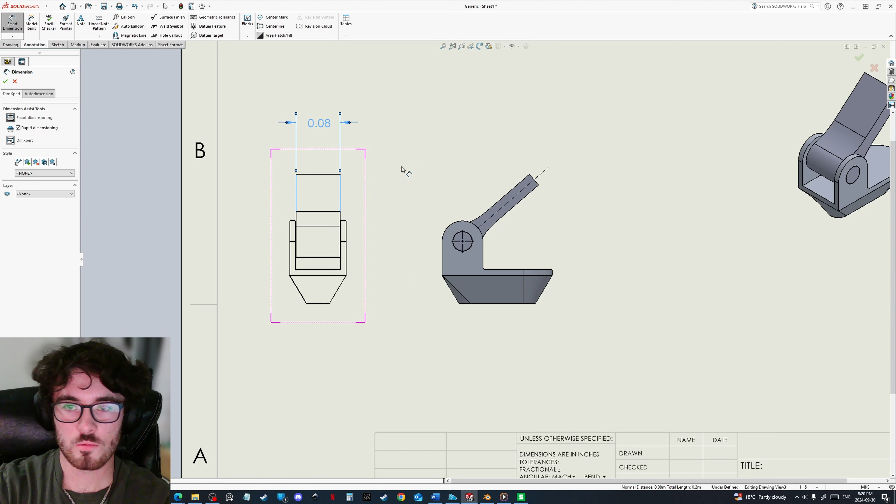If you wanted to make that a center line, you could add center marks. So if I wanted a center mark on that circle, you can always add dimensions to tell people specific things about the model and how it was dimensioned.

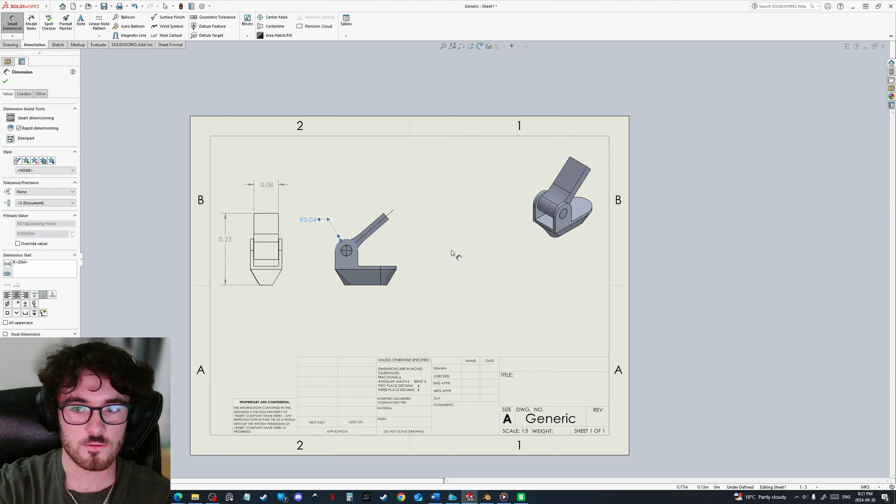Some rules of thumb: try not to cross your dimensions as much. Try to keep all your dimensions off the model. They shouldn't be intersecting, and always try to keep as few dimensions as possible. But if you're ever in doubt about whether you should include a dimension, you should always just include it, because it's just a pain in the ass if somebody has to figure out what that dimension is instead of just looking at it when you could put it in. And you just kind of go and you define your model.

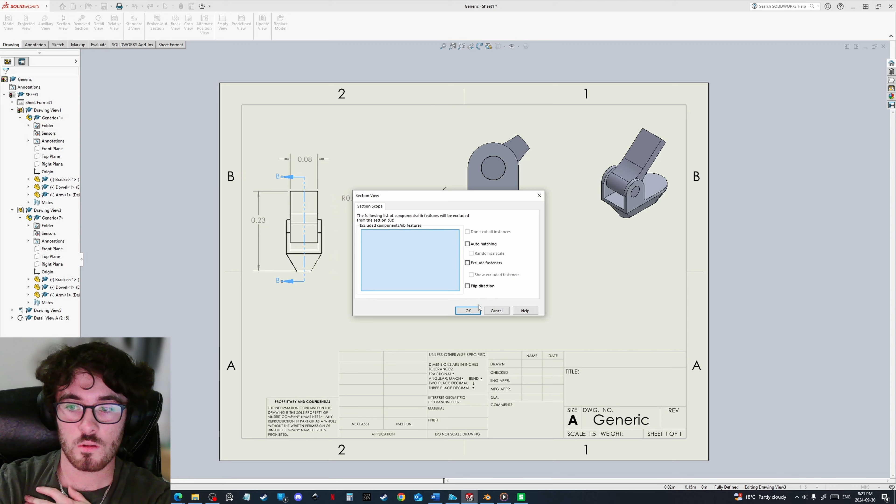Yeah, pretty simple. You can make different things like bills of materials, different kinds of views, like detail views if you really wanted to show off this circle, and then you can see that up close. You can make section views where you can see the... Sure, I don't know what it's trying to tell me. And then you can see the cross sections of different parts. So you can get really into some of this drawing stuff, and I don't really care for it, but it's pretty cool, and it's definitely useful to know, especially when you're interpreting other drawings.

So now let's look at some extra resources that you can use to help study or practice. This is something called Model Mania. SolidWorks does it, I think, every year. They have 25 years' worth of parts to try, and it's really specific to the software. So you can try and design all these different parts. You can see how this one has a loft, an extrude, some curves in there, and you have to do it using only these dimensions. And this is basically what the CSWA certification is based on, so practicing this stuff is always really useful.

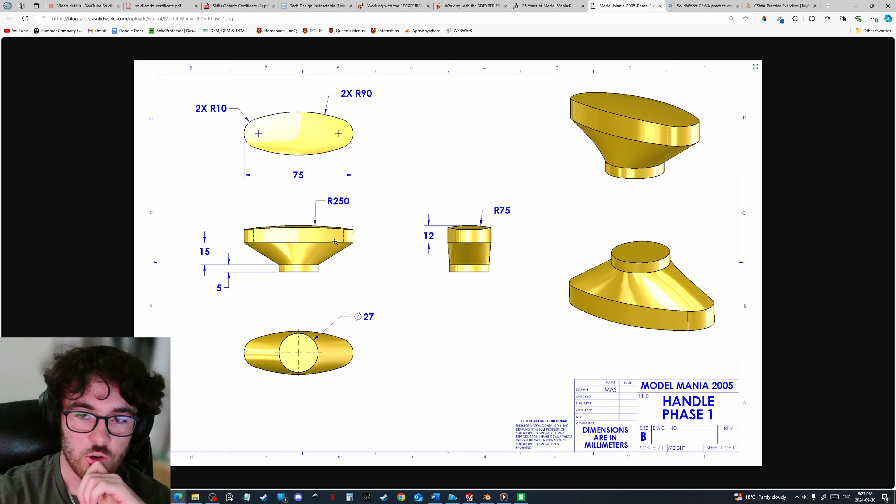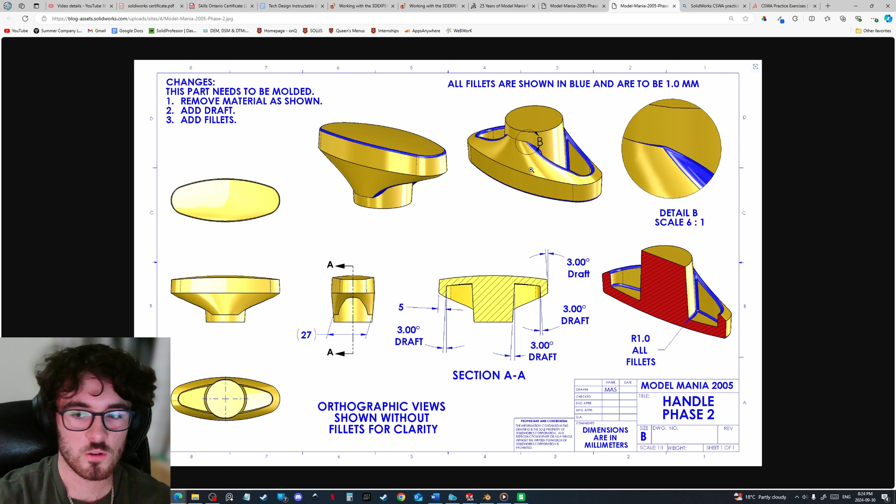And what's also really cool is you go back and you have to make changes to the model, because you're never going to get it right first try. So you need to see how well your model adapts to these changes and how easily you can make them. And you can always time yourself and see how fast you can be. It's always fun to treat it like a speedrunning challenge. You can get really fast, and if you don't know how to model something, there are always videos included, so you can watch and see exactly how somebody else would do it.

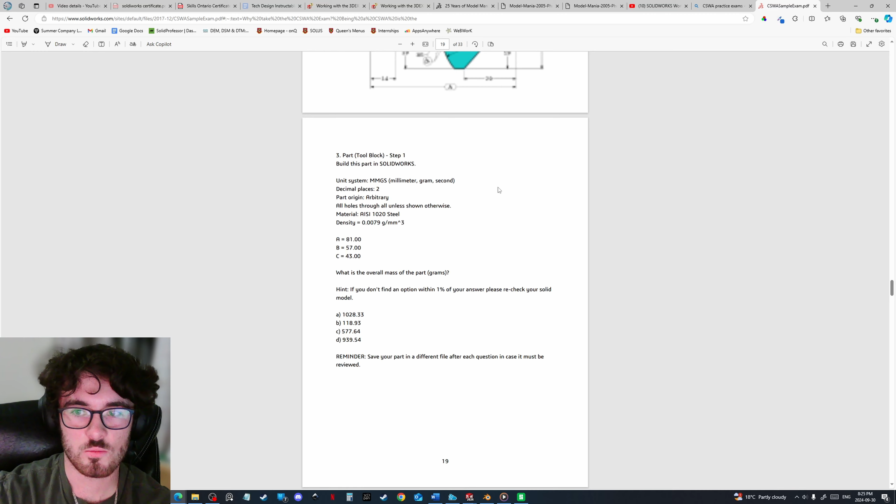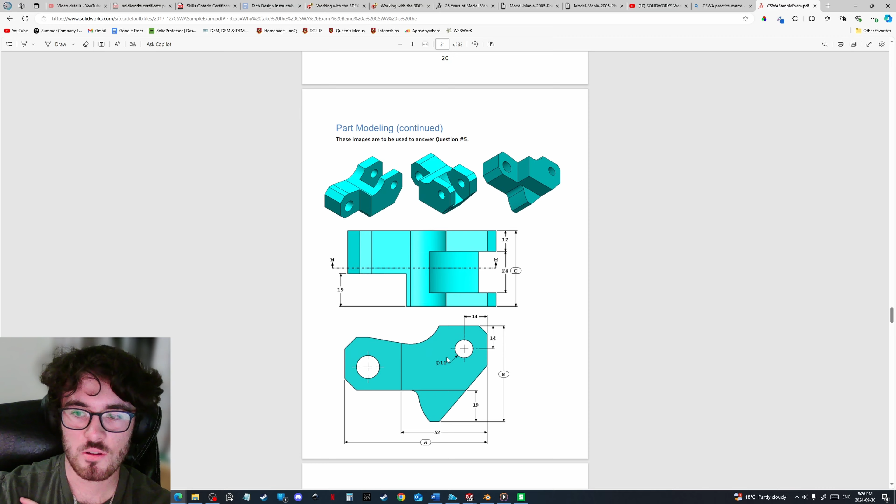So the last resource I wanted to share with you is the CSWA practice exam. This has tons of really good, solid questions. You can download a wizard for it if you really want to, and then you can answer some multiple choice. But what we're really interested in is the part modeling section, where they give you a part and basically tell you to model it. Here are all of your dimensions, and you need to model this part. This one looks really sketch heavy with just one extrude. Then they tell you the dimensions of some of these variables. Then you have to modify the part by changing the variables, and then make some other changes by changing the variables again and adding some extra features. And then there's some assembly stuff. Nobody really cares. There are answers included. Very good resource for practicing.

And one more resource that I actually used when I was learning SolidWorks is a service called SolidProfessor. If you're willing to put down some money, or if you know somebody that has a professional license with SolidWorks, sometimes this is included. Even though you have to pay, it's really cool because all the tutorials are built around getting you to the final exam, which is getting your certification. So it's a really cool way to learn the software, and then you actually get something to show off that's endorsed by SolidWorks. And yeah, I think that's about it.